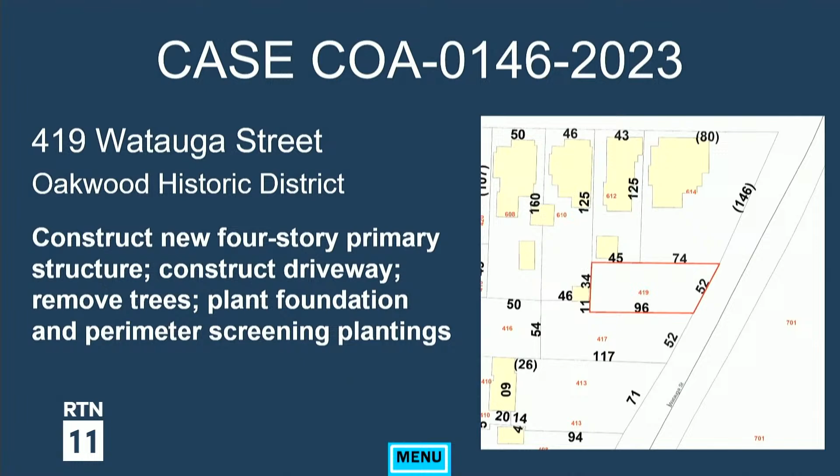This is case COA 146-2023 for 419 Watauga Street in the Oakwood Historic District. The request is to construct a new 4-story primary structure, construct a driveway, remove trees, and plant foundation and perimeter screening plantings. This is just a brief overview of the currently vacant lot, same photos you've seen for the past 2 hearings on this case.

Summary of staff concerns is the congruity of the overall height, size, scale, and mass of the proposed building, congruity of the proposed roof forms, and built mass calculations have not been provided. Also, contributing evidence for the size or configuration of some of the door and window details, and additional typical detail specifications that could be conditioned.

We have the full application materials that are already attached to the agenda, available as a digital presentation for the applicant just in case that's needed, and also some new neighborhood photo example information as well.

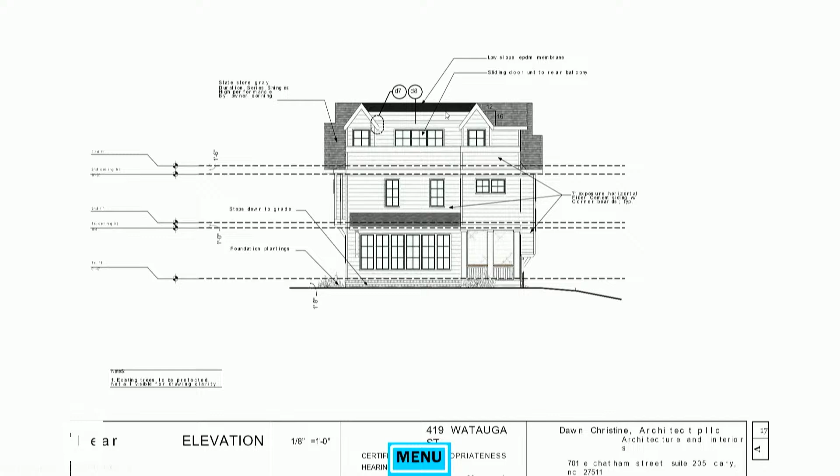On the back, we pretty much kept everything the same. On the other side, again, we just took that water table idea around, as we had talked about in our last meeting. You can see on the back elevation there's a small gable on the left and a small gable on the right, and both of those gables seek to conceal that low slope roof on the attic level. So from the side, it looks like just a traditional gable on both side views.

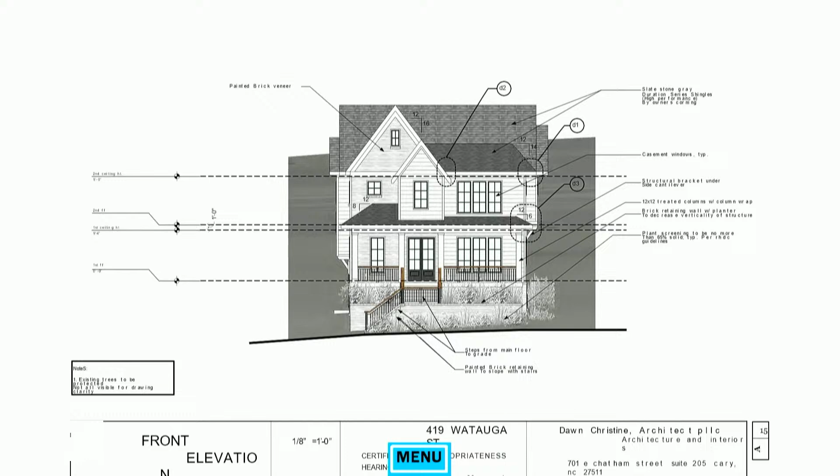We adapted our floor plan to make everything work out. We shifted our staircase back to try to get a more traditional organization of windows on the front, because that was one of the comments—that the windows and their position due to the stair were non-traditional—so we adjusted that. We provided all the eave details that are in the submittal, and updated the floor plans and roof plans accordingly.

And then we updated all the drawings that have the height diagrams. Per our last meeting, there was discussion about what is the basis the RHDC has for measuring height, and it was noted that they don't really have a standard for that. In this lot, because it slopes from low to high, we have a larger height to deal with in the front of the building, whereas the folks on the back side of this block have a lower height, and the slope works in their favor from the front, whereas in our design, the slope works against us. So it would seem rational to compare building heights relative to the first floor rather than to the grade.

In all these examples, the building height is comparable and within 10% of all the houses that are around this house.

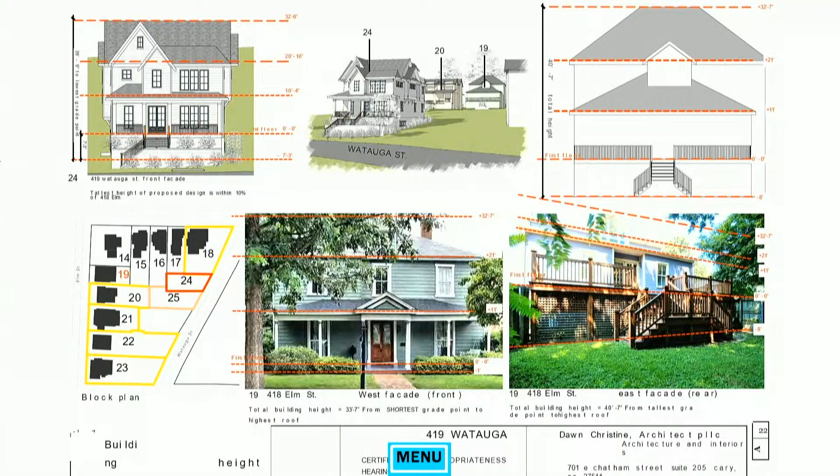You can see in this example it's got a 3-story back, a 2-story, 2.5-story front. At 418 Elm Street, same thing—it's got a whole first floor below the main level on the back side of the house. At 404 Elm Street, same condition—it's got some steps up to the main floor, but again it's got 2.5 stories, and if you count the gable roof on the side, it's got a full accessible attic in that house.

So in all these comparisons, our house is at 32.6 here, taking it from below the grade, from below the finished floor, and it's very comparable to all the houses in this block. This diagram shows the height off the back grade and the height off the front grade, and then an average grade. In comparison to all the houses around it, you can see it is well within 10% of all the houses on its block.

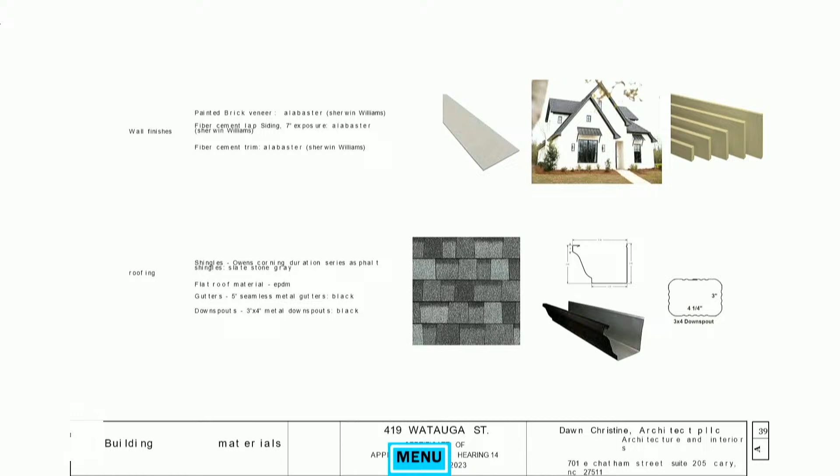So with this design, not only did we compromise the garage, we compromised our ceiling heights, we compromised trying to address every comment and feedback that we received, and tried to provide some of these extra material details that you need and want. And of course, we will provide whatever other details and information you need us to provide.

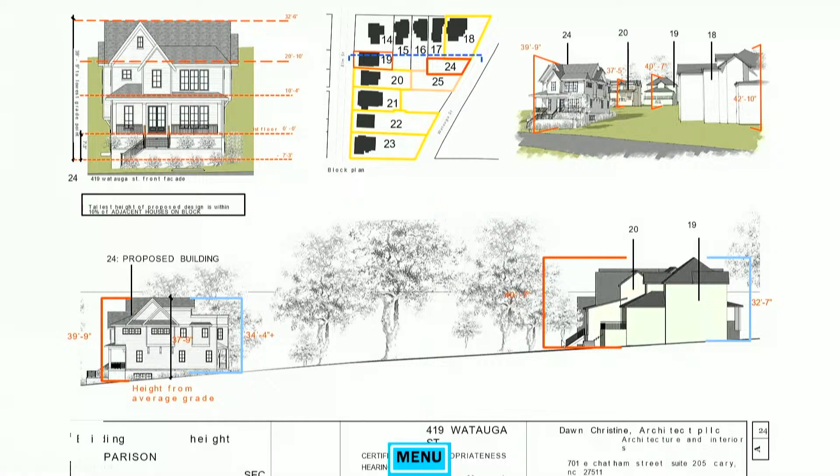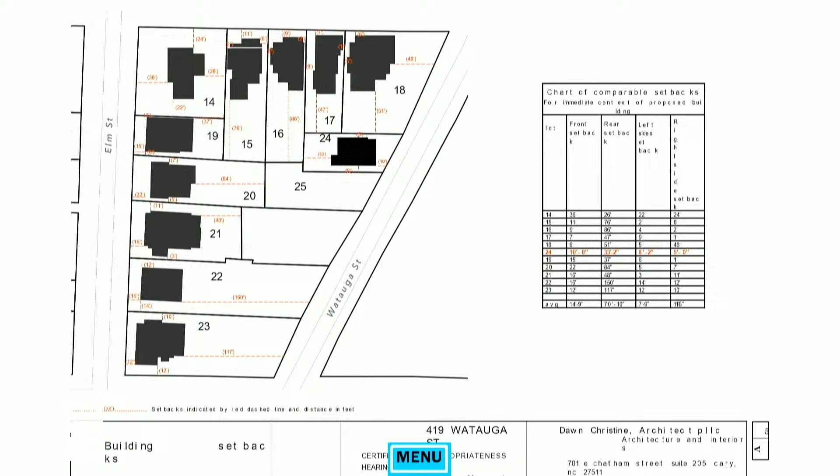So whether it's built area or built mass, I'm seeing a lot of black on this lot compared to the others. If you look at lot 19, which is similar in size to our lot, you can see their built mass is actually quite larger, and their proximity to the setbacks is closer. So in comparison to a lot similar to ours, our built mass is actually percentage-wise less. There's a built area comparison on page 4 or page 7 of the PDF if you're on your computer. Yep, I am. Thanks.

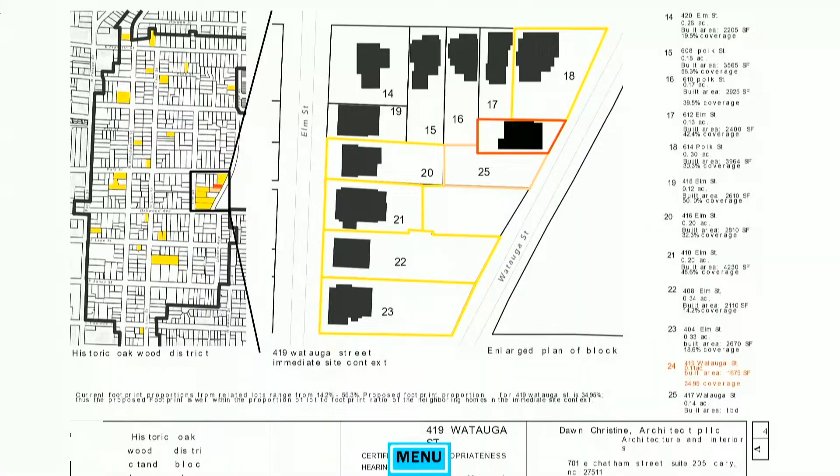Thanks for answering that. The facade materials and the mix of brick for the full height - I feel we've seen a lot of updates, but there's still a lot of mix of brick and lap siding. Is there evidence for that mix, maybe nearby or well-related? So right here, we've got a brick foundation, and we've got horizontal siding right next door.

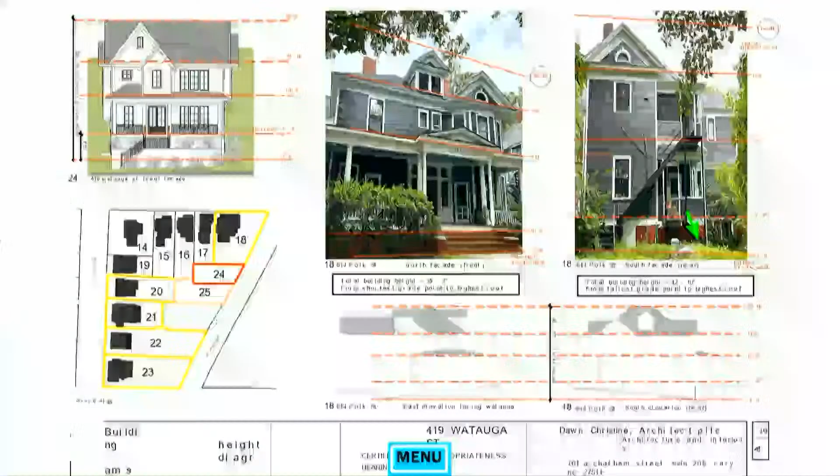How it's about 614 Polk.

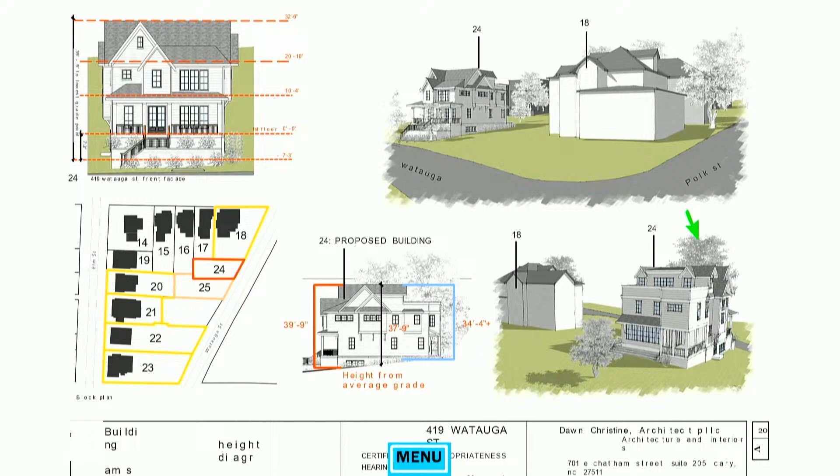And am I understanding, if you'll pause there for just a second, on the house itself, on the left side of the front elevation, am I understanding correctly that that is brick? So do we have evidence of brick and lap siding above the base of the building? Well, this house right here on 416 is all brick facade. And then on the back, it does a combination of brick and siding.

And then last question, the staff concerns about some of the window details. I see there's generally a language of a single grill down the center within a multi-light pattern. It's a casement operation, and it's simulated divided light. Is that right? Didn't we put the window in there? I thought we did. Okay, there is a cut sheet in here. I can find it.

One little question about your front elevation, just a clarification really. For the roof over your front porch, I'm noticing on the left-hand side a 12 and 8 slope to meet, and then on the right-hand side a 12 and 6. Is that correct, that they slope differently on each side? Okay.

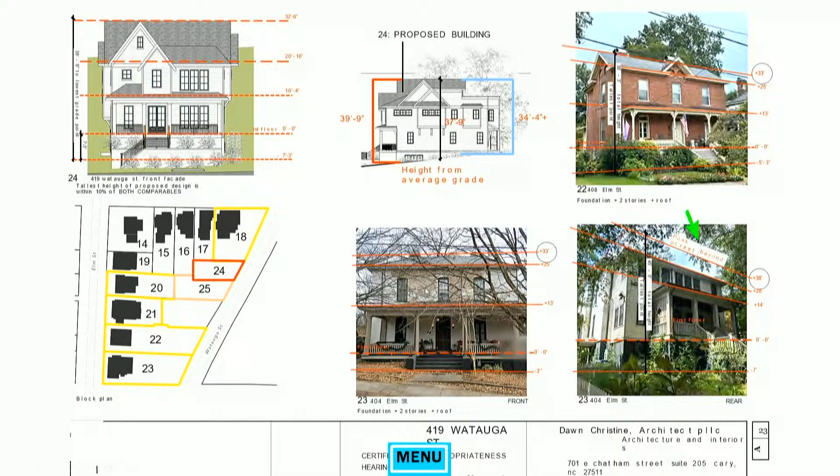The other question I had about your front facade, is your intention with your brick section from roof line to foundation for all of your brick to be the same color? Okay. And is your siding also that same color? Okay, let's see.

The last one I was hoping to get some feedback from you on is for your rear porch, the upper rear porch. Can you give me some insight as to your reasoning for making that a solid guardrail all around? Is there evidence for that? I'm just curious about it. Yeah, it's just more of a privacy thing. You know, if you have children out there, it's just safer than railing. Okay, thank you. I think that was all for me.

Tracy, any questions? Okay. Jordan, any further questions? Rob? Nope. All right, go ahead and close the evidentiary portion of the hearing. Y'all can have a seat. Thank you very much. Now we'll proceed with committee discussion.

Question for staff, and this is related to our standard of review, just so we know what our next steps are. We've seen this case multiple times. We have to reach some decision due to time, is that correct? I'm sorry to make eye contact, you're the only one looking at me. I defer that answer to Raz. It's my understanding that every time you make a decision to defer, you are taking action on the case, but Raz can speak a little more to that legal timeline.

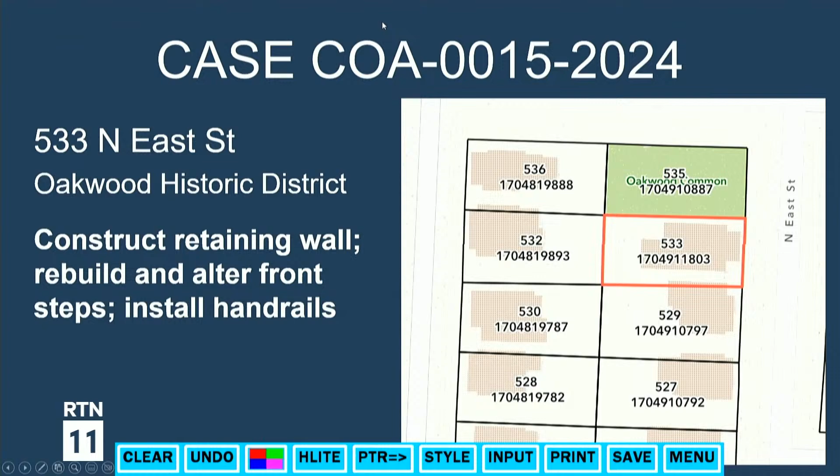You can see the property here on North East is just the first one to the south from Oakwood Common. This is a view from North East Street, focusing on the front. This is a view from the north looking south in front of the park, and a little closer in front of the driveway walkway area. This is a view from south of the house looking back towards it, and a detail of the current front steps.

A summary of staff concerns: there's really primarily one, and that is supporting evidence for the use of a concrete or stone cap on the steps. And then generally, some material details and specifications that are usually provided as conditions.

Thank you. I'll go ahead and ask the applicant to come forward. Is the applicant here? Have we seen them? Do we know what they look like? Mark and Patricia Hyde? We have met them. I couldn't tell you what they look like, though. Maybe they stepped out during the recess? Have they? I don't feel like everyone's here who's been here. We could push that to the end of the agenda, just in case.

Next, this is COA 23-2024, 1535 Caraleigh Mills Court, number 220. Recognize staff for their presentation.

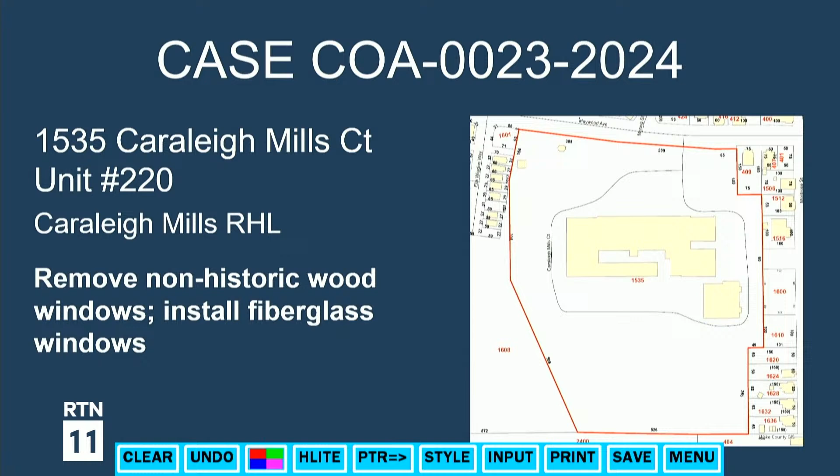This is case COA 23-2024 for 1535 Caraleigh Mills Court, specifically Unit 220. This is the Caraleigh Mills Raleigh Historic Landmark property. The request is to remove non-historic wood windows and install fiberglass windows.

This is a view of the overall front of the property from Maywood Avenue, with more overall views as we step closer. This is a view from the rear parking lot. About where you see that brick stack is roughly the location of the unit, its interior in that central courtyard, so not visible from any street. This is the tower where the windows are located, on the east side I believe.

A little more in terms of context with the two-story section of the original mill building, and a detailed shot of those existing windows. This has been shored up a bit; the owner wanted to stabilize the glass while waiting for the hearing.

Staff concerns are that this is proposed work to a character-defining feature and will create a mix of window types where historically mill windows are identical. The proposed window design will not exactly match the existing. Full window specifications, including a scaled section detail and muntin profiles, were not provided, and a physical sample of the proposed substitute material product was not provided. That's not necessarily required, but is sometimes useful to you as a committee as you evaluate new substitute materials.

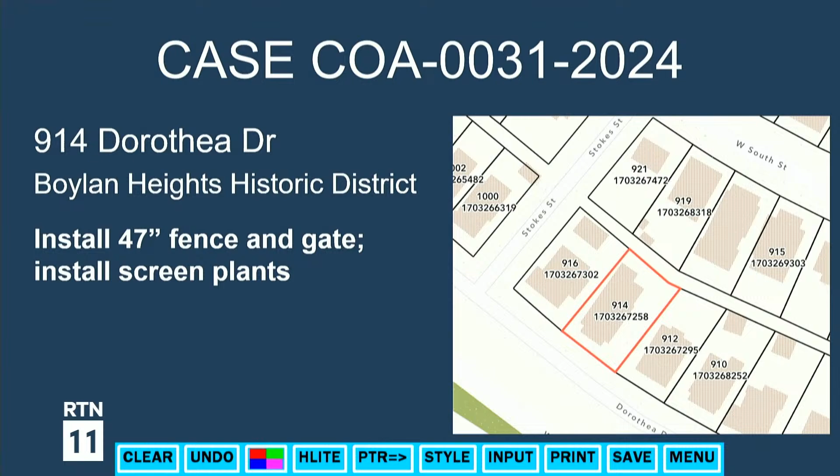This is COA 31, 2024 for 914 Dorothea Drive, located in the Boylan Heights Historic District, a general HOD. The request is to install a 47-inch fence and gate and install screen plantings. This is a view of the property from Dorothea, and a little closer. The proposed fence area is along the side of the house, closing off the side yard, from the corner of the house to the edge of the current fence. There are no staff concerns.

All right, will the applicant please come forward? Please introduce yourself. My name is Allison Hutchins, and I'm the applicant and owner at 914 Dorothea Drive. Please raise your right hand. Do you solemnly swear or affirm that the testimony you're about to provide is the truth, the whole truth, and nothing but the truth, so help you God? Yes. All right, thank you.

I am here to answer any questions. I appreciate the help of staff in writing the staff report. The main reason for this is safety - we have 2 young kids, and want to provide more delineation between creating a backyard of our side yard and an increasingly public front yard. I appreciate your consideration and am available for questions. Seeing no members of the public in attendance, we'll go ahead and proceed with committee questions.